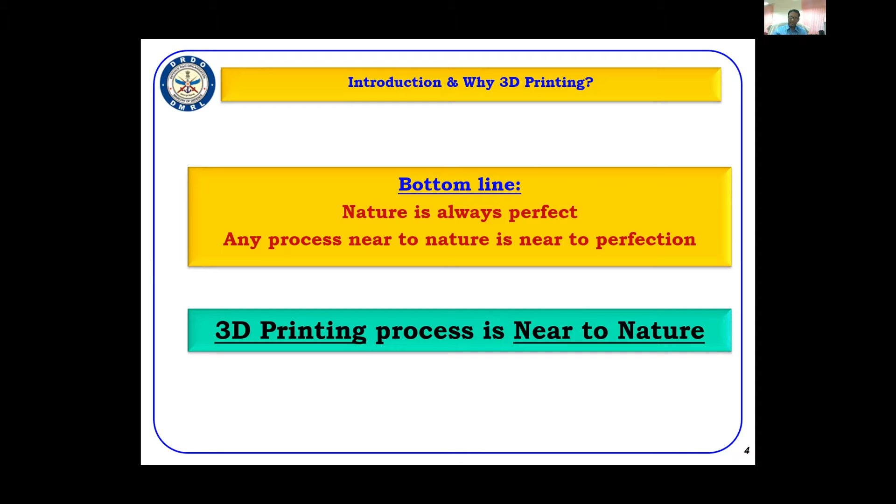Why I'm quoting 3D printing as near to nature, there are some reasons for that. Let us see some characteristics of nature. If we see the assembly, all man-made systems are an assembly of individual parts for the system to work. If you see any man-made system like a car, it is an assembly of thousands of components. Even a simple chair is an assembly of so many things.

But if you see nature, we will not see any assembly. It is unified in nature. Any complex system, even rockets we send into space, are all assemblies of a number of components. Whereas in nature, we won't see anything of this kind.

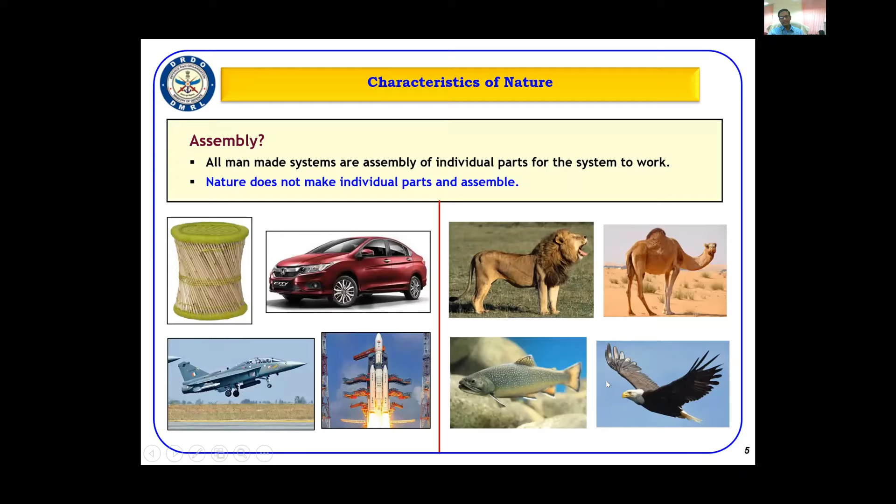Then let us look at the wastage. If you see nature, there is no wastage - almost everything will be recycled. Whereas in the assembly of components, we take a bulk component and start removing material, that is subtractive manufacturing. All manufacturing of components by humans consists of waste.

If you take a specific case of the aerospace sector, the buy-to-fly ratio in some cases is as high as 20. That means if 100 kg of input feedstock or material is taken for a component, we'll get only 5 kg of component at the end. That means 95% of the material will be wastage.

We'll see another... let us see. I request the audience to mute themselves so there will not be any disturbance. You can mute, sir. Wait, one minute, I'll mute him. Can I start again? Yeah, please, you can start, because there was some disturbance.

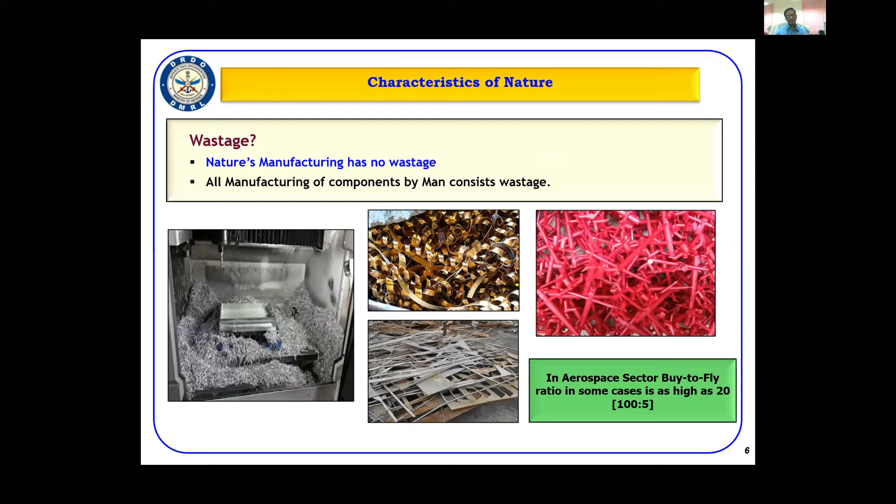This is another characteristic of nature where we hardly see any wastage, whereas man-made structures and manufacturing of any component involve a lot of wastage. In the aerospace sector, the buy-to-fly ratio in some cases is as high as 20. That means about 100 kgs of input feedstock material, if taken for manufacturing a component, finally we end up with only 5 kg of useful component. About 95 kgs of material goes as wastage. Considering the cost of material in this high technology sector, that is a huge cost towards the final component we get from this manufacturing.

Again, if you see the manufacturing, nature manufactures everything by an additive process. Any living thing on this earth will have multi-material composition—not only one material—and will be multi-locational, multi-directional with different properties, and multi-layered. There will not be any assembly; everything will be unified. In many cases nature also makes repairs on its own, whereas manufacturing carried out by humans is a subtractive process where material is removed to create the part, causing a lot of material wastage. Finally, we have to assemble the parts to make the final system.

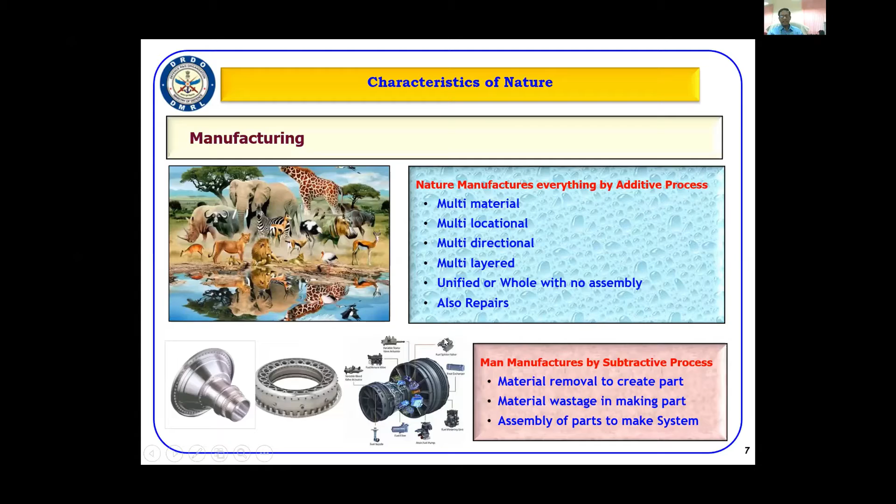So in this slide, I would like to reiterate that one should always approach any problem with open-minded thinking, without any boundaries, restrictions, or inhibition, and without preconceived thoughts. Nature has shown us that everything in nature is perfect, and every process and activity in nature is perfect. Solutions are many times simple, and we should always aim towards efficient processing rather than just doing processing in the normal routine manner. Any process we adopt, being in manufacturing or any other area, if we are near to nature, then we are near to perfection. That is always what we have to aim for.

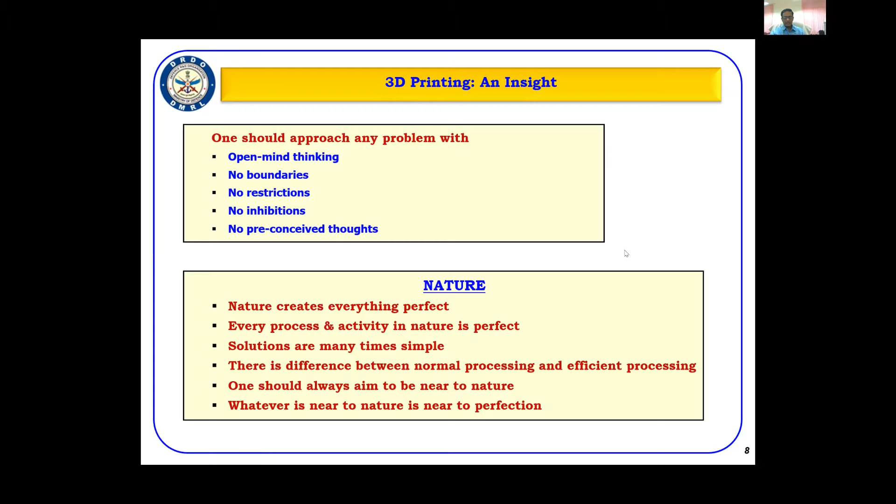So this, in respect of 3D printing, happened in the year 1987, where the sign of manufacturing changed from minus to plus—that means from subtraction to additive—and has dominated since. Earlier, manufacturing was completely dominated by subtractive machining, and with the advent of manufacturing using the additive process by 3D Systems, the manufacturing sign changed from subtractive to additive.

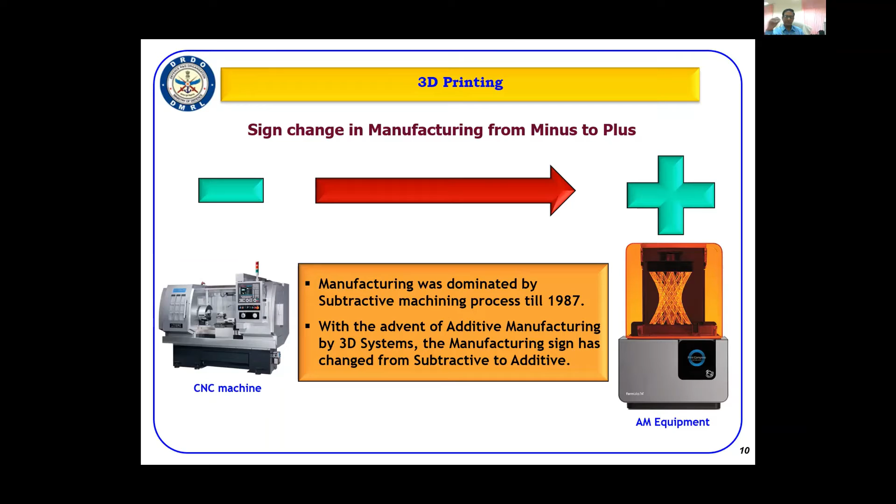We will always be listening to a number of terminologies of 3D printing, additive manufacturing, rapid prototyping—a number of terminologies are coming into the scene, and many times people get confused. I thought I'll briefly give a detailed explanation of these terminologies for the benefit of the audience. Many of you may be aware, but it will still be useful for others who are coming to this course for the first time.

3D printing and additive manufacturing are two terminologies that are synonyms for the same process. Both terms refer to the process of building or joining materials layer by layer from a CAD file. 3D printing and additive manufacturing can be used regardless of the type of material—either plastic, rubber, or metal. Anything manufactured in a layer-by-layer format is termed 3D printing or additive manufacturing.

People who work in additive, industrial, or manufacturing areas prefer to use the word additive manufacturing since it sounds more formal, whereas the media and hobbyists prefer to call this technology 3D printing. This has been more so ever since inexpensive desktop printers became popular, and the term 3D printing has come into wider use. But if we see the standards of ISO and ASTM 52900, it terms this technology as additive manufacturing. So in technical terms, it is called additive manufacturing.

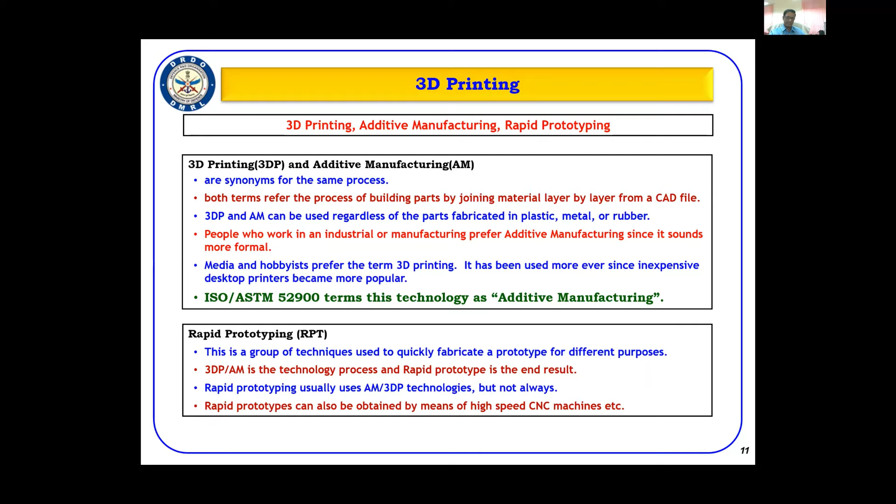If you see 3D printing, we can realize very, very complex components which are otherwise not feasible in conventional manufacturing processes available in traditional technologies. With 3D printing only, it's possible to realize very, very complex designs.

It is also possible to have multiple designs and prototypes. If you see normal traditional manufacturing, if a single design has to go through the stage of proving its design, a lot of tools have to be made and designs have to be made, and it's a very costly process.

Whereas in 3D printing, it is possible to freeze a number of designs at the initial stage itself, and all the designs can be 3D printed in the first stage itself. Then they can simultaneously go for design validation and choose the design which is more appropriate for our requirements.

It's also true that 3D printing in its initial stages mainly contributed to product visualization, because earlier, in the beginning stages of 3D printing, it was mainly made using polymers and plastics, and the main purpose was to visualize the product, to understand how the end product will likely look and what features it will have. That was one of the major advantages of 3D printing.

I'm in a meeting, I'll call you back.

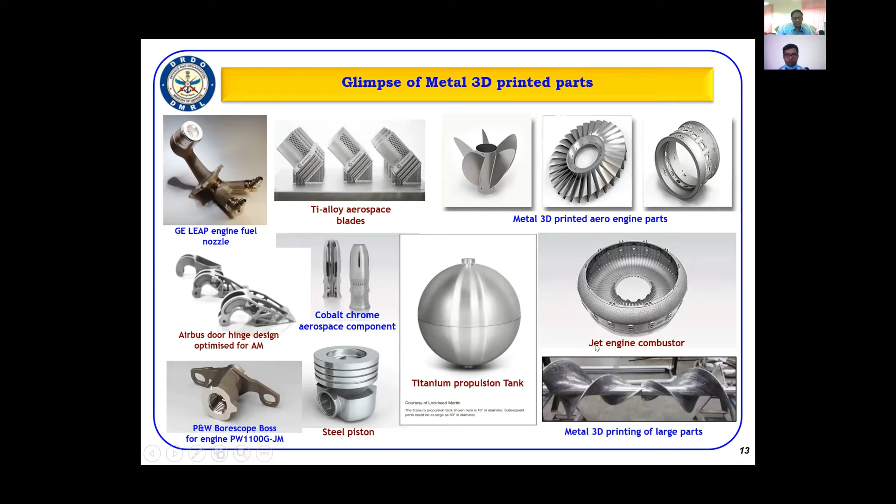Yeah, and even large size parts are also possible using these 3D printing technologies of this nature. So those are related to the advantages or benefits we are going to attain.

Just excuse me one second. Hello, I'm in a meeting. Meeting, no, I'll call you back after 1 hour.

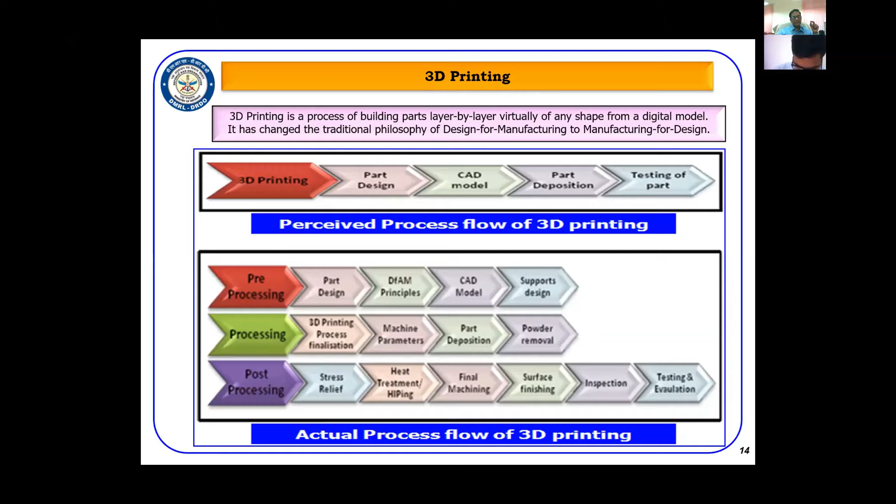Many times the surface finish of the component attained in 3D printing may not be up to requirements, so we have to adopt different techniques for improving the surface finish, then inspection, and since this is a new technology, a full-fledged evaluation and testing of these components is required before final release for actual applications. So the normally perceived process of 3D printing actually has a lot of other processes that are part of it, which have to be taken care of in detail by those using this technology for their applications.

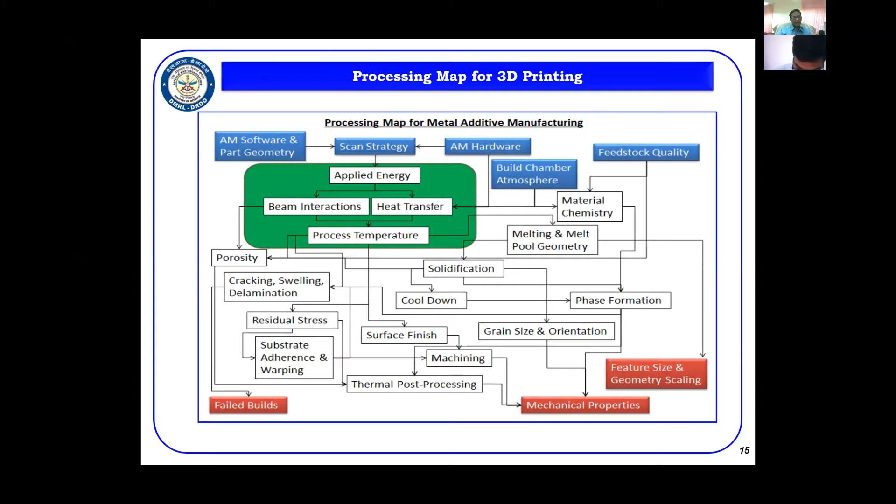Now looking at the processing map for additive manufacturing - this is the additive manufacturing processing map - there are a lot of properties and things we have to take care of, like software, scan strategy, what hardware we are going to use, what feedstock quality, and what porosity we are going to get.

In the pre-processing stage, the knowledge of the feedstock or powder material is very important. Unless we have a grip on these powder metallurgy processes, we may finally end up with porosity, which may result in failed builds.

In the processing stage, the laser-metal interaction has a very dominant effect on the process of solidification, cooling of molten alloy, material chemistry, and melt pool geometry. These processes are directly responsible for the formation of different phases, grain size, and orientation, which dictate the final properties obtained on the component, or the defects on the component. Even in post-processing, thermal processing like heat treatment and hipping are all very important.

One has to take care of these aspects whenever attempting metal 3D printing, so that you will be able to get the component with the required properties and required features and geometry, without any problems of porosity or other defects. Metal 3D printing is not just a printing process, it is a conglomeration of metallurgical and mechanical engineering. Independently, either of these disciplines will not be able to reach the final goal. Both the mechanical and metallurgical aspects of the material behavior of metals in 3D printing have to be understood in detail, so that components can be obtained with proper properties at the end of this process.

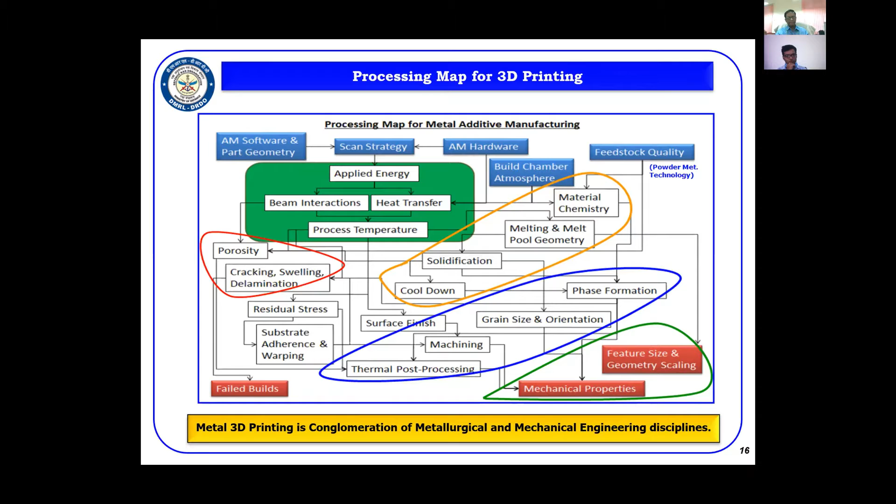Again, in this, the 3 P's are very important, as I mentioned. In the pre-processing, identification of the individual part or component is very important, because we have to see which component is very difficult to manufacture as an independent part due to complexity or high material or manufacturing costs, or choose a component which is very complex to assemble, where individual parts involving welding are prominent reasons for failure of components.

So wherever components have such features or processes, those components have to be selected. It is not that every component has to be selected for this process, because traditional manufacturing technology also has its own say, and when parts are manufactured in bulk, traditional manufacturing will still have an upper hand because of commercial aspects. So the identification of which component has to be identified must be very clearly understood, and only complex components should be considered for 3D printing.

The second aspect is the redesign of the component. The parts we have been selecting are all designed based on traditional manufacturing design principles, which are often over-designed. So when a component is adopted for additive manufacturing, we have to relook into the redesign of the component, so that we can reduce the number of materials or the assembly or number of parts, to finally improve weight reduction and product performance. We can also incorporate additional design features to improve efficiency. This redesigning aspect, if possible, has to be taken care of in the pre-processing of the component taken up for additive manufacturing.

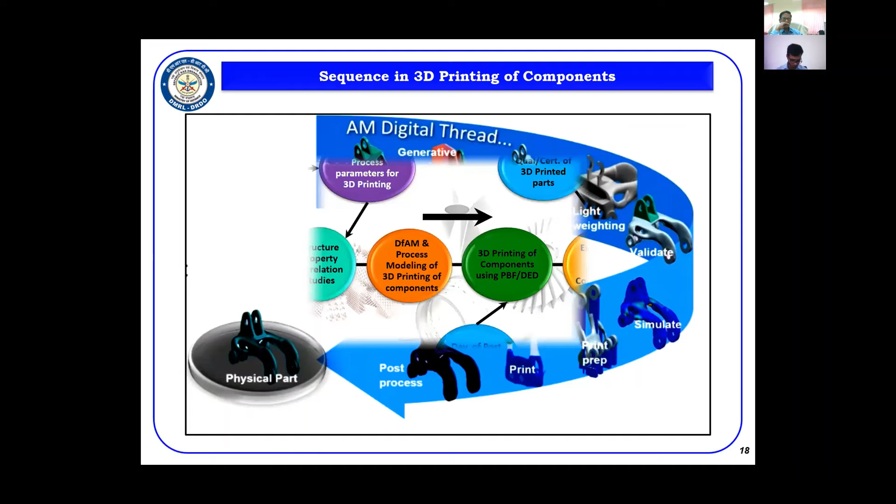This is the flow chart of the 3D printing technical activities. We can even see which type of technology has to be adopted, which will be explained in the coming slides, such as powder bed fusion or directed energy deposition.

We can talk about structure property correlation studies, design for additive manufacturing principles to be adopted, modeling of 3D printed components, and simultaneously studies on qualification and certification of 3D printed components. That is a major area. Unless components are qualified or certified for final use, it's not possible to release them for actual applications. Delivery of final components only happens after qualification or certification has been carried out.

Before going ahead, I'd like to present the classification made by ISO ASTM 52900. Additive manufacturing processes are divided into 7 different categories. I will not go through the other categories of 3D printing. I'll limit my discussion only to metal-related 3D printing, where powder bed fusion and directed energy deposition are the two major technological processes applicable for metal 3D printing.

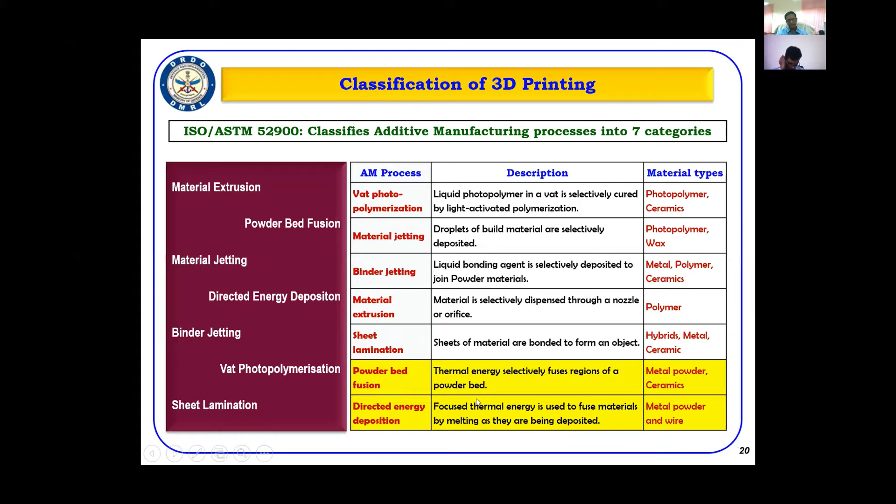For powder bed fusion, there are a number of synonyms: DMLS, direct metal laser sintering, multi jet fusion, laser cusing, electron beam melting, selective laser melting. All these terminologies apply to powder bed fusion technologies. In this process, a layer of powder is spread over the build platform, and the laser or electron beam fuses the first layer as per the CAD model of that layer.

Once that layer is fused, the next layer of powder is spread across the previous layer, and the process repeats until the entire model is created. This is generally termed powder bed fusion, also called powder bed technology. Other technologies like directed energy deposition are called powder fed technology, where material is deposited from a nozzle.

These are the nozzles - there are 4 nozzles - with a high power laser or electron beam that fuses the metal or solid metal of the object. Material can be in the form of powder or even wire in some equipment. Material is again added layer by layer and solidifies to create the final object.

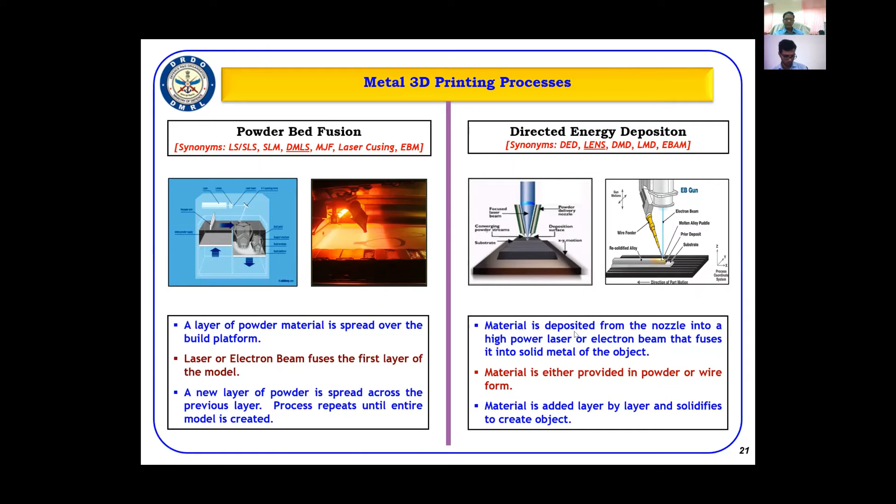In powder bed fusion, components with highly complex design and fine features can be made up to 300mm. Now equipment is coming even above 400mm with multiple lasers, and products requiring good surface finish and minimal machining can be 3D printed directly for end-use applications using this technology.

Topology optimized designs for weight reduction, including conformal cooling channels or lattice and foam structures, can be 3D printed using this technology. All biomedical applications use powder bed fusion for manufacturing bioimplants. PBF is a proven technology for industrial production and on-field deployment, and a lot of components are being made using this technology.

There is a very high requirement in the defense sector for producing components through this technology because of the complex and intricate design features or innovative designs required. This is the most appropriate technology to adopt in the defense sector, and it is essential for development and optimization of process parameters for 3D printing of indigenous development requirements.

The powder requirements for powder bed fusion technology, the material powder required as input feed material, is in the range of 10 to 40 microns - only this type of powder can be used. The equipment cost compared to DED or EBM is on the lower side, whereas the only disadvantage of this process is that it's very slow. The speed can be 10 to 200 grams per hour, whereas input material cost is very high. Typically, Ti64 material costs about $600 per kg, and Inconel 718 costs $200 per kg.

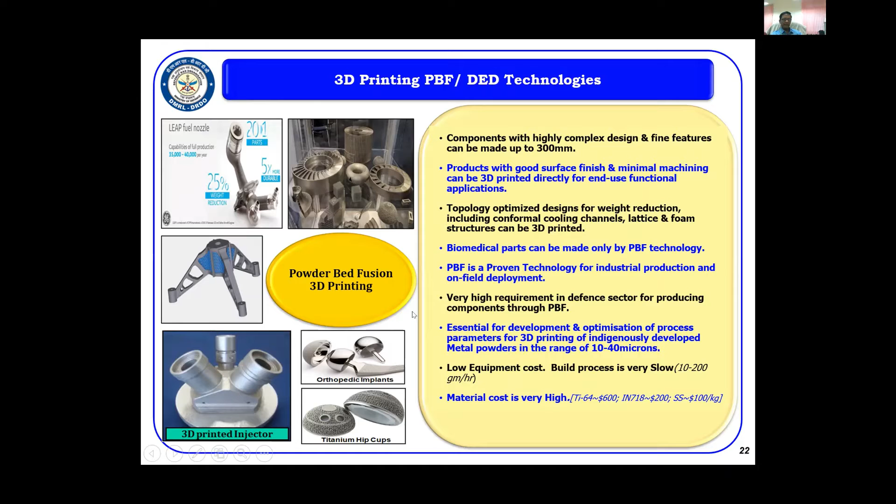Coming to the next technology, DED, direct energy deposition. Here we can manufacture components using 3D printing up to a medium size of 600 mm, with relatively less complex components. But this technology has another advantage of developing functionally graded materials. This is only possible with this technology, where you can have different layers of different materials to suit the requirements of our designs. Such functionally graded materials are possible only using this technology.

This technology can also be used for repair of very high value parts, mainly in aero engines, where rejections and the cost of rejections are very high. All these rejected parts can be repaired or refurbished using this technology, and a lot of foreign exchange can be saved. It is also possible to use this technology for feature additions.

This is the only technology feasible for this. Powder bed fusion is not possible for feature addition. Any feature that has to be added to an existing part can only be done using the DED 3D printing technology.

It is also possible to develop new materials. We need not restrict our developments only to existing materials. It is possible to have newer materials with multi-alloy powders and different types of properties suitable to our requirements. This is possible only with the DED type of 3D printing.

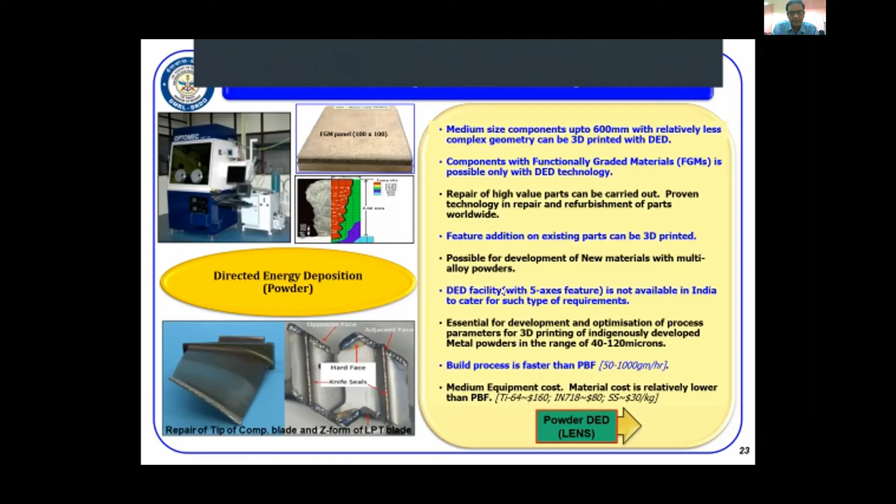I think participants might have seen the direct energy deposition of the material in a layer by layer fashion, and that is how the process works. Similarly, there is...

Similarly, I will talk about the other type of DED technology where wire is the input feedstock material. Using this, we can go up to sizes of 1500 mm. It is mainly applicable to gas bottles, and huge forged components can be made using this technology.

This has already been proven for the propulsion tank gas bottle, where Lockheed Martin has demonstrated that development cost has been reduced by 55%, and time has also been reduced by 80% when compared to conventional manufacturing of this component.

It is also suitable for a broad range of materials, including refractory materials. Refractory materials were a little tough in powder bed fusion, whereas these materials can be easily 3D printed using direct energy deposition with wires.

Coming to the cost of this component, the input feedstock material is far cheaper when compared to powder. But the disadvantage is that the cost of the equipment is too high.

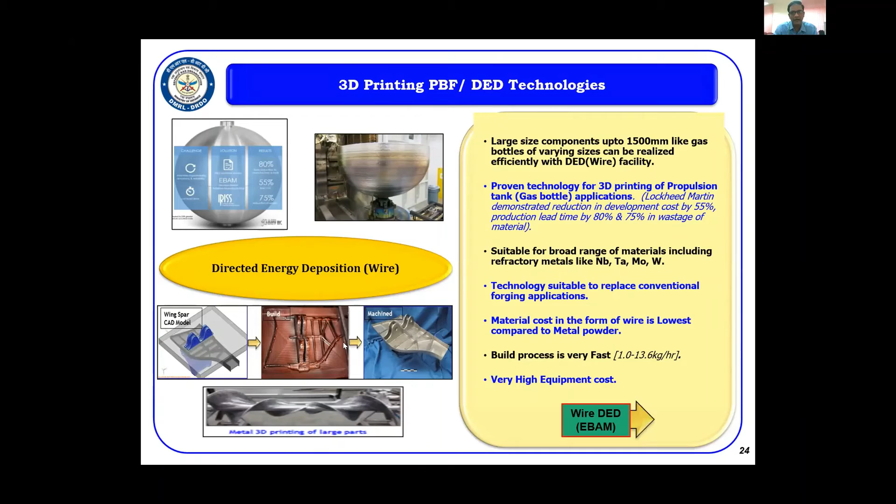Depending on the type of requirement, the complexity of the component, and the finish required, we have to select which type of technology should be adopted. It is not a single solution for all applications. It has to be decided based on the application, complexity, shape, size, and quality requirements. Finally, cost and time also matter most.

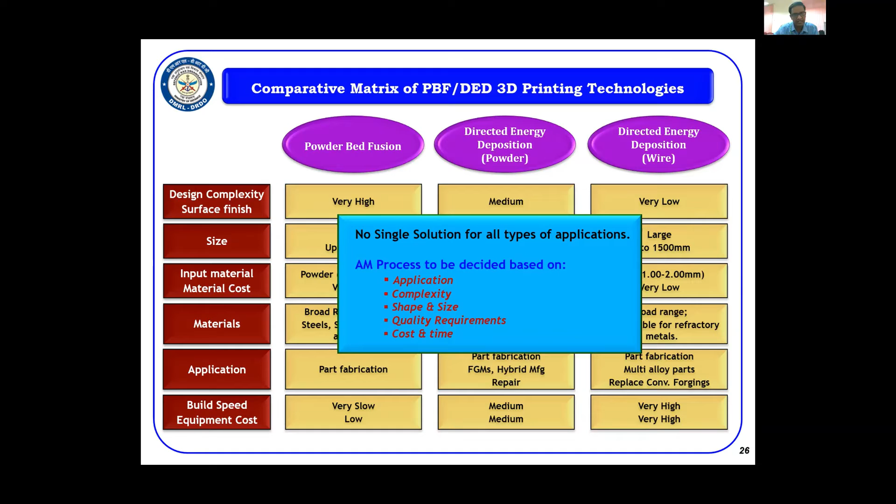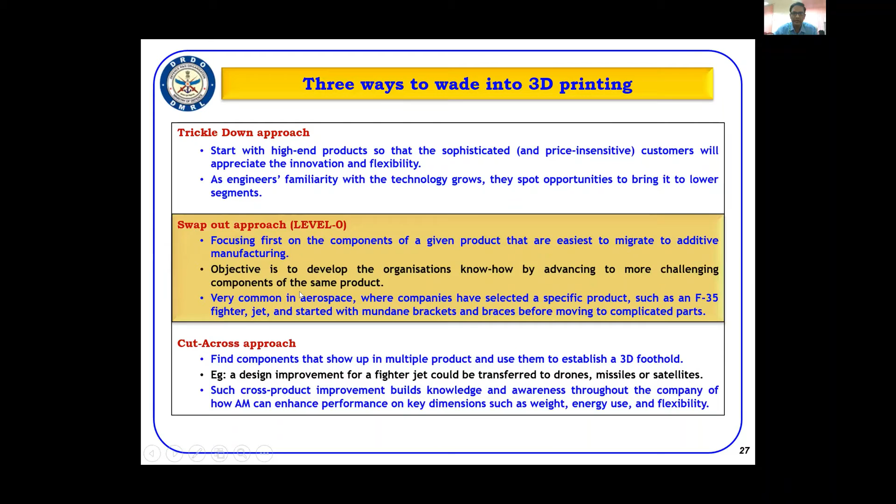This is one of the major, very good slides adopted by GE USA. They have come up with different levels of thinking: level 1, level 2, and level 3. In level 1, an existing multi-piece part is taken up for demonstration with a reduced number of components using 3D printing. The classical example is the jet engine fuel nozzle.

In level 2 thinking, the components taken up are at the system level, where one module of the engine is taken for 3D printing. Over 100 pieces were consolidated in the example of a CT7 combustor, and redesign of these components gave significantly cooler temperatures. There's an example of that application already shown.

In the design for additive manufacturing philosophy, the total engine is subjected to design review, and each and every component has to be handled using 3D design for additive manufacturing principles.

One example where this approach was made is the advanced turboprop engine of GE, where 855 parts were reduced to just 12 parts. That means 35% of the engine was reduced to only 12 parts, with 855 parts clubbed together. This also resulted in elimination of a number of structural castings, and the development cycle was reduced by half.

So 3D printing is fabrication of components, but it's not only 3D printing. Once we 3D print a component, the story doesn't end there. Detailed evaluation of the component is very important, and that is what adds to its applications - that is the value addition that has to be made.

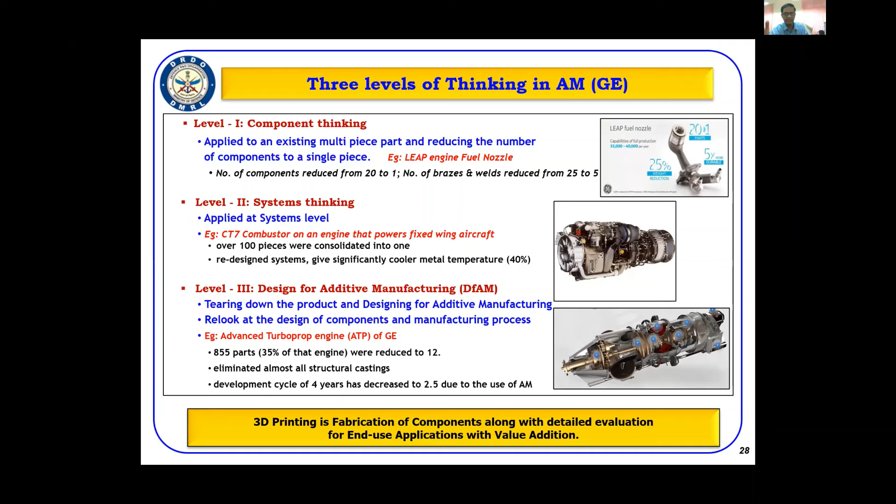Now let us come to the actual case studies. This is the equipment or facility we have in DMRL, established in the year 2008. This was one of the unique equipment available in the country at that point of time, with a working space of 300 by 300 by 300, working on the DED principle, with a power of 1 kilowatt.

We had 2 powder delivery systems with 4 nozzles, and as I mentioned earlier, it was only a simple 3-axis machine where very simple parts could be made.

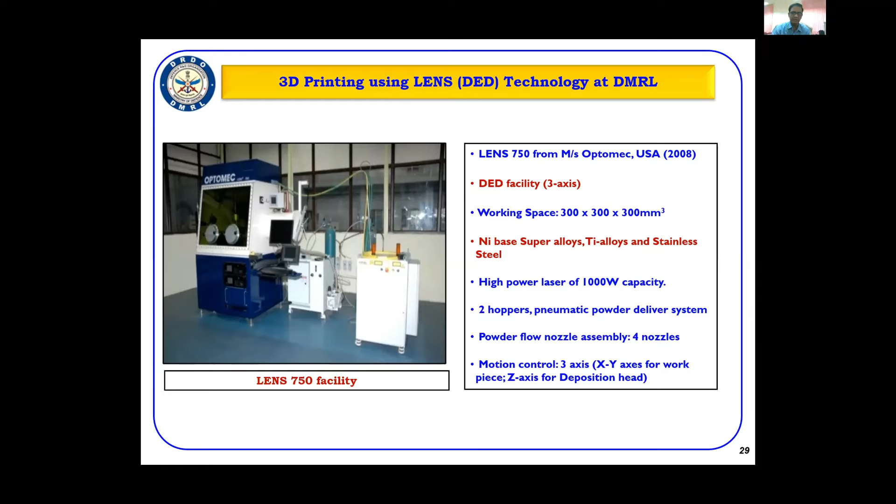The main intention of having this facility was to understand the metallurgical aspects of materials in 3D printing - how they behave, and what sort of metallurgical features result - studied in detail using this equipment. This is one of the activities we carried out for development of FGM panels for hypersonic applications.

We developed the know-how for optimization of parameters. That means, before taking up material for actual deposition, we should be able to understand the most optimized parameters. We adopted the design of experiments approach, so that using only 13 specimens, we could get the most optimized parameters required for this material.

So for almost all materials we were handling, the process parameters have been optimized and developed. We have also demonstrated the feasibility of making FGMs using very precise control of layer composition in materials SS316 and 625, and also developed Ni-YSZ ceramic based FGM panels for combustion liners for high temperature applications in hypersonic vehicles. We have also established process modeling techniques for estimation of melt pool dimensions, thermal cycles, and hardness distribution along the process length for one of the materials.

From this I'll touch on one or two cases in the subsequent slides. If you see the matrix, this is what we generated for 13 different specimens to obtain the optimized parameters. I would like to draw your attention to experiment number 2, where the laser power was 300, scan velocity 8, and powder feed rate 21. We resulted in a porosity of about 0.7%.

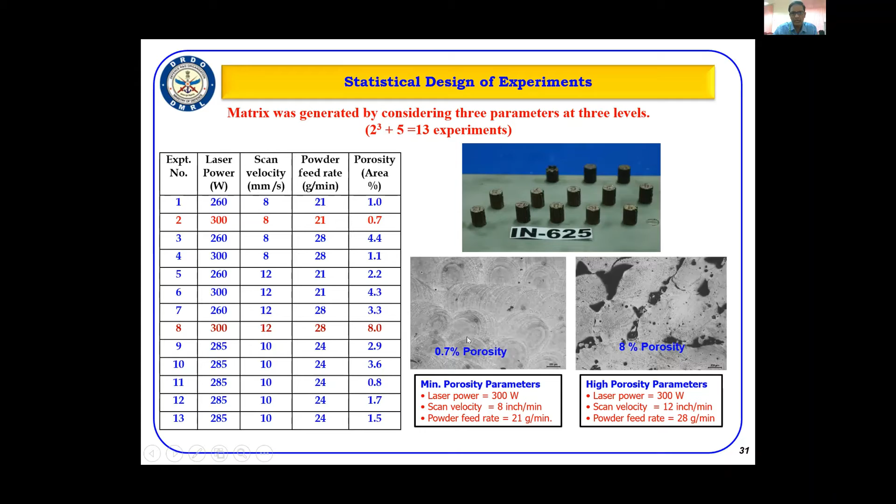Whereas for the same laser power, with different scan velocity and powder feed rate, the porosity was 8%, meaning it was only 92% dense. So such things are possible, and one has to obtain the optimized parameters before going ahead with the actual deposition of the component.

We have also evaluated the tensile properties of the deposited materials for two different materials, 316 and 625, shown here. They are all near to the wrought and annealed process. These are the tensile properties obtained using the optimal process parameters. Using these parameters, the deposited samples are all at par with that of the wrought and annealized material.

But we have seen a very, very fine cellular structure in the deposit, which compensates for not being heat treated. That means as-deposited itself, we could get properties that are near to the heat treated properties. This has been attributed to the very fine cellular structure we obtained, compensating for the lack of homogenization treatment and grain refinement during mechanical working, while still achieving equivalent properties.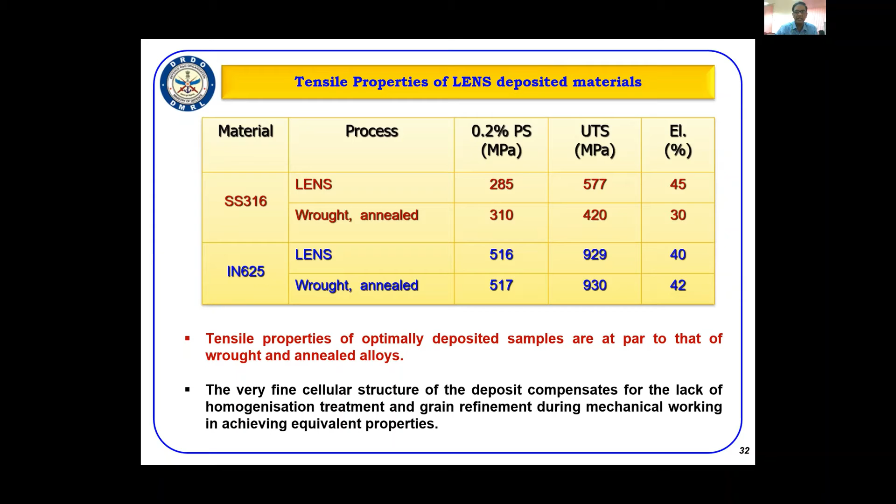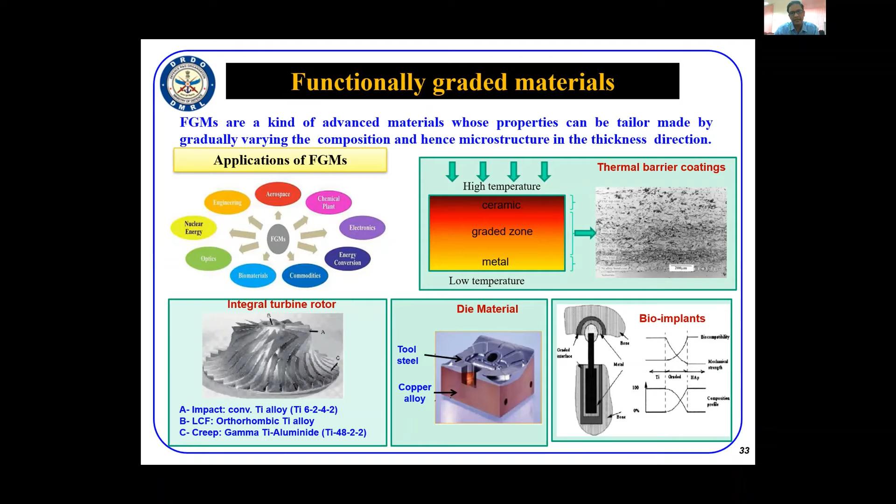And this is about functional graded materials - these are again a kind of advanced material whose properties can be tailor-made gradually varying the composition and hence microstructure in the thickness direction. These functional graded materials we have developed for hypersonic applications, and I'll go into a little more detail on one of the activities we took up for this FGM component.

So here we have YSZ thermal barrier coatings on nickel-based alloys, where the initial base material is nickel-based, and these components involve very high thermal shocks and high temperature exposure using the LENS facility. The conventional YSZ coating, when applied on normal superalloy, was suffering from low durability because of the large mismatch in thermal expansion between the metal and ceramic.

Due to this, the coating was failing, so we adopted the route of 3D printing or direct energy deposition using this technology. Gradually, the variation of thermal expansion was attained along the thickness using a varying composition FGM via LENS processing. This process reduced the thermal stress and hence increased the durability of the coating.

Initially we successfully developed and demonstrated the coating for a 100 by 100 mm sample. We used two different bond coats on the substrate of the 625 alloy, and the composition of ceramic has been varied from 25, 50, 75, and 100%, so that a gradual variation of the coefficient of thermal expansion was obtained. These were subjected to thermal cyclic resistance testing and were meeting our requirements.

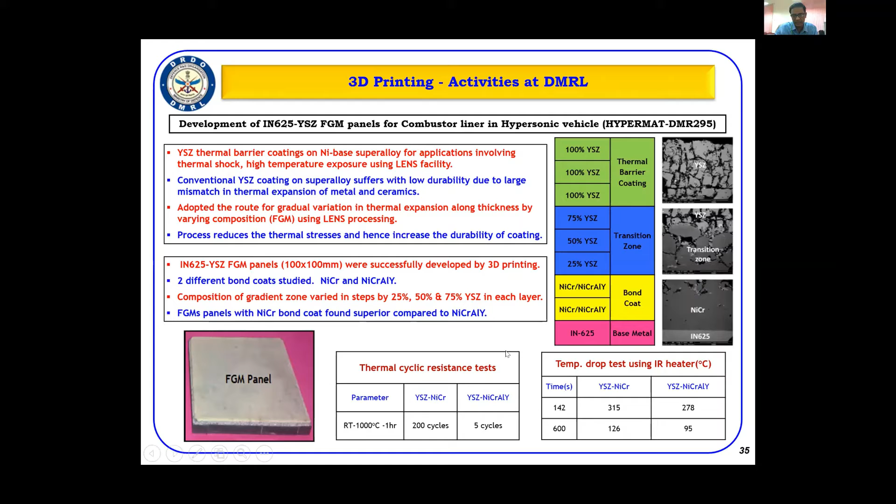And this is one other piece of work that has been carried out. Let us go further.

Again, using this facility, I would like to talk a little about its limitations. We could only demonstrate simple shapes using these components - complex components cannot be made due to this restricted 3-axis limitation. Presently, machines are available with 5-axis features. The machine we have is also not having closed loop process quality control, whereas the latest machines are now equipped with this type of feature. The limitation of size was also one of the problem areas - now machines are coming with higher build sizes.

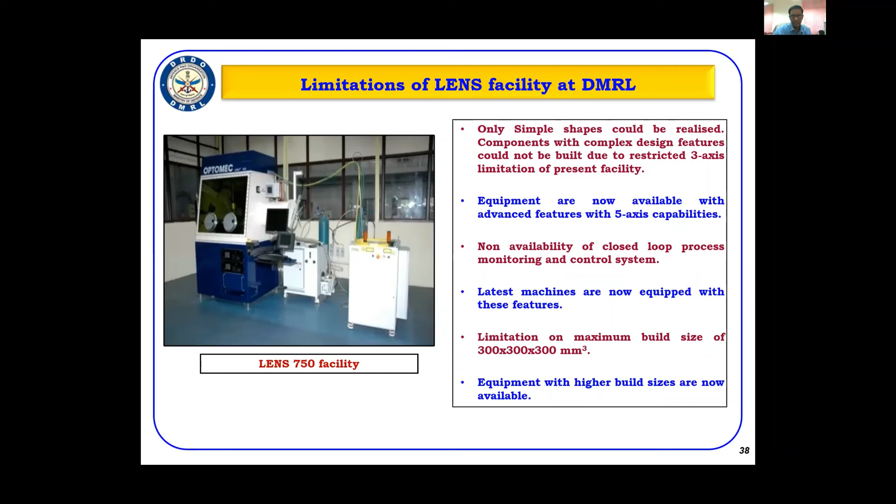In the conventional manufacturing, this component is an assembly of 2 parts: the injector and the injector ring at the bottom. This was being made using complex machining from a cylindrical block using CNC machines. Part 2 is welded to part 1 using EBW welding, which is a very costly process, and the 3 injector holes are made through the EDM process. This is the presently conventional manufacturing methodology being adopted.

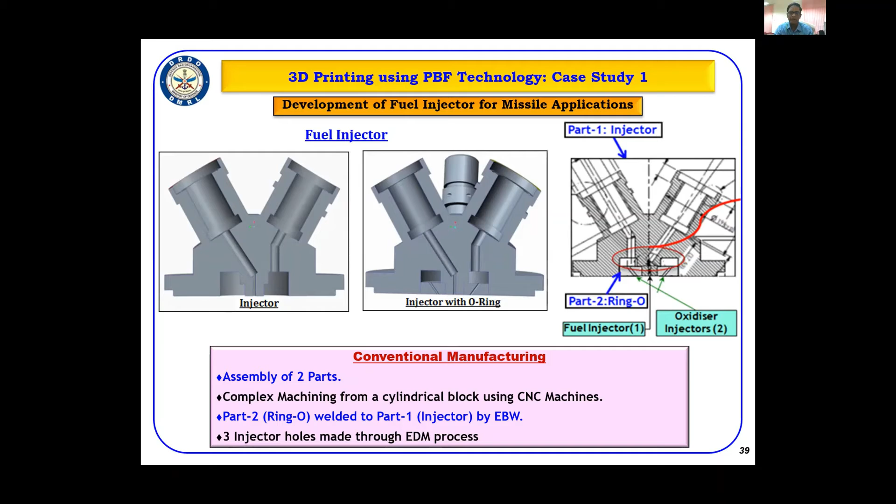This component has been taken up for 3D printing. Initially, it is necessary to look into the design features of this component and make necessary design modifications to make it suitable for 3D printing. In 3D printing, we have assembled the 2 parts into one, eliminating the welding aspect and modifying the design to completely avoid support structures.

If we see the internal regions where the oxidizer or fuel will be coming through, there will be... for manufacturing, as I mentioned, we have to go through the redesign of this component. The assembly of 2 parts has been made into one.

In the conventional process, the initial design has a rectangular cross section. To manufacture this using 3D printing is not possible without providing certain support structures. But if we provide support structures there, it's not possible to remove them after the deposition of material is completed. That is the reason we adopted a novel design approach where the internal rectangular cross section has been modified to a triangular cross section, removing the necessity of support structures.

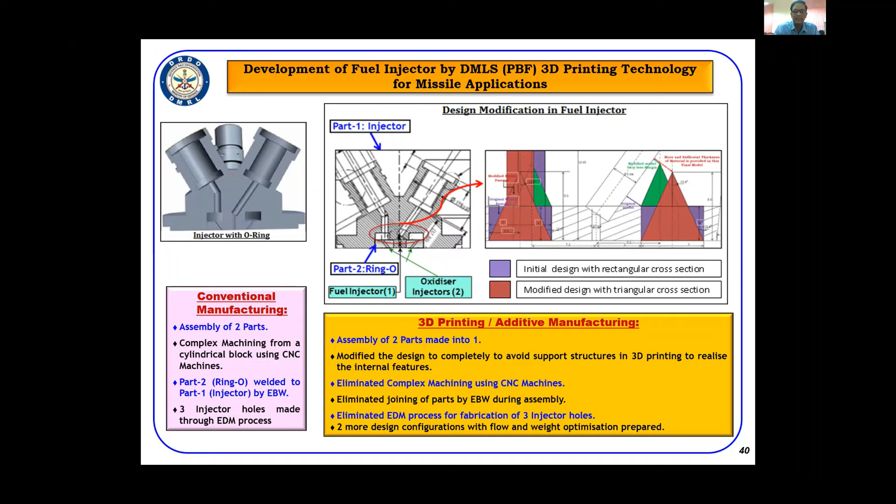This is the initial design we made, and we also made 2 more designs with flow optimization, which we'll talk about in coming slides. This is the design of the initial version where the fuel will be coming through this channel and the oxidizer will be coming through this channel, which will meet for the further combustion.

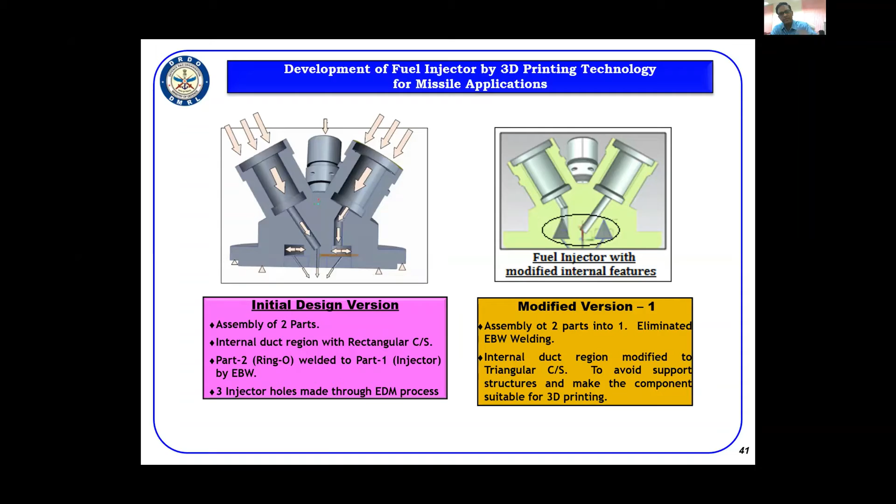In the modified version, 2 parts have been made into one, eliminating the necessity of EBW welding, and the internal duct region is modified into a triangular cross section to avoid support structures and make the component suitable for 3D printing. These are the only minimal changes made compared to the conventional component, which has been taken up for 3D printing using the facility available at HAL.

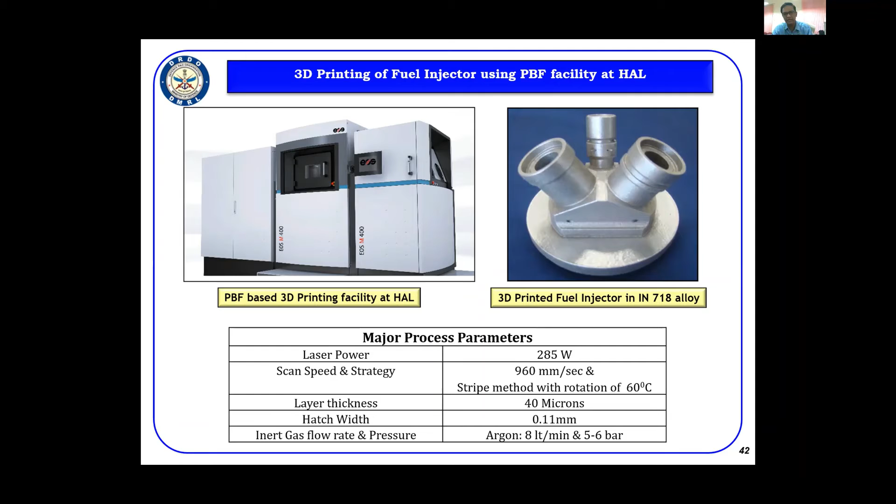We have carried out this deposition using optimized parameters as mentioned here. The layer thickness we adopted for each layer is 40 microns with a hatch width of 0.11, and the inert gas used was argon at 8 liters per minute. Using this facility, this is the component we have 3D printed.

So the story doesn't end there. Just having the 3D printed component and going for the application is not possible. We have to carry out detailed evaluation and testing of this fuel injector component to understand whether it meets the mechanical properties, whether it meets the metallurgical properties, and other requirements.

Initially we carried out the chemical analysis of this component, taking material from it, and checked whether the composition matches that of 718 with the AMS 5662 specifications. The material was found to be homogeneous, and the elemental composition was found to be within specification. That is one of the good results we obtained regarding the chemical analysis of the component.

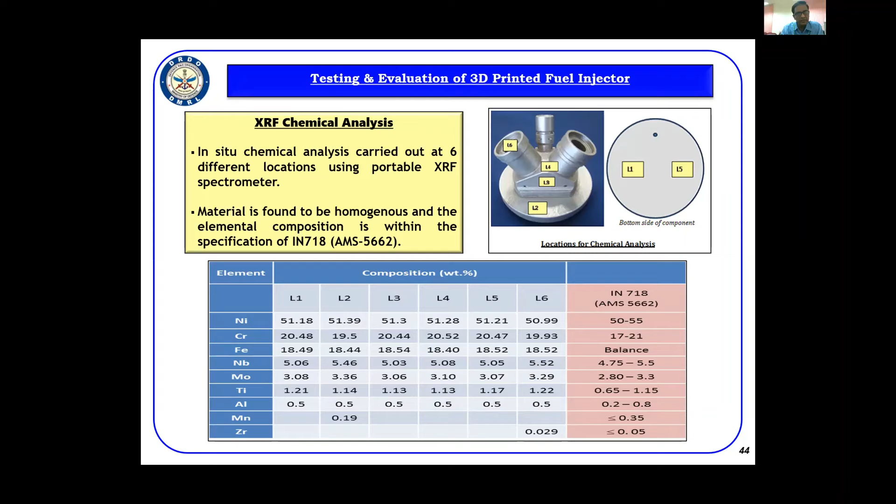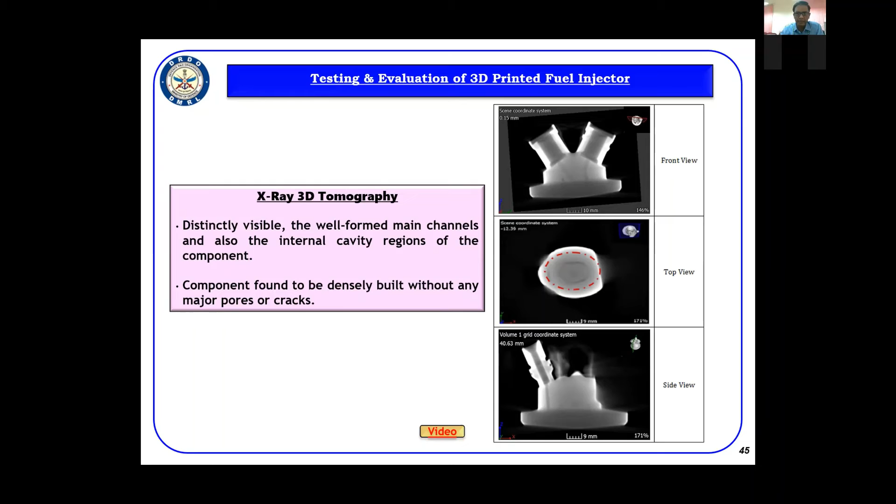Then we wanted to see whether the internal features had been built properly. We can't go with destructive testing of this component, so we adopted X-ray 3D tomography, where images have been taken at different layers. We saw very distinctly the well-formed main channels and internal cavity regions, and the component was found to be densely built without any major pores. These are the pictures from the computer tomography. Then we took a small piece.

We have carried out further evaluation to understand the metallurgical aspect of this material deposition. We have taken a small piece from the component to see what sort of microstructures have been obtained, in both the transverse direction and the longitudinal direction.

In the transverse direction, we could clearly see the scan tracks, and the melt pool formation was also very clearly visible in the longitudinal direction, as shown in each layer. The presence of subgrain formation and very fine cellular dendritic structure, which is very common for 3D printed materials, has also been observed.

We have also seen columnar grains growing in the build direction. In the build direction, grains are found growing in the columnar direction because of the remelting of the previous layer of material.

As per our earlier experience of DED metal 3D printing using the LENS facility, similar structures have also been obtained on 625 and 316 materials in LENS deposition. But we have seen certain amounts of porosity, very fine impurities, and very fine porosity in the microstructure evaluation, which we have taken up further for analysis.

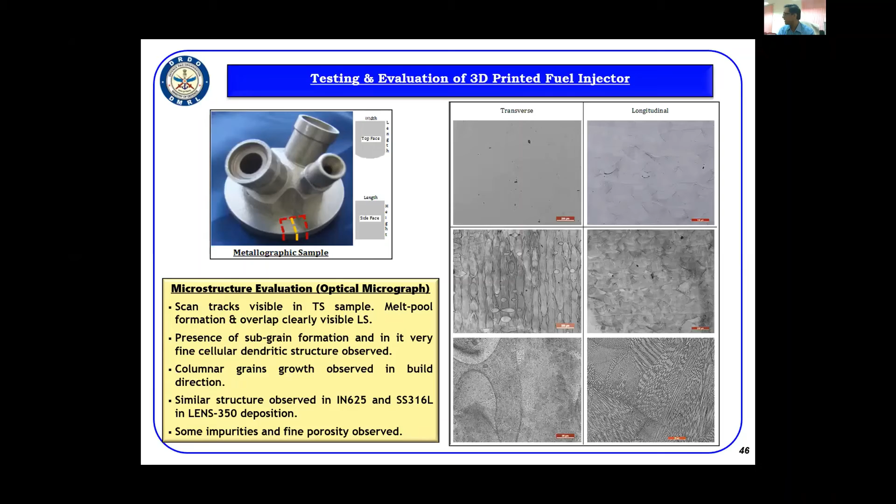We have also seen heavy elements segregated in the interdendritic region, consistent with previous studies, due to high solidification rates, which is not generally seen in conventional materials. This type of segregation was not visible before, but we have seen it here.

There are also spherical pores formed in the microstructure evaluation, which we could not initially understand. We thought these were all entrapped gases. The overall porosity was determined to be a bit less than 2%.

To understand these impurities, further analysis was carried out using EDAX spot analysis to examine the gray and dark particles. What we found in this analysis is that the fine spherical particles were identified as alumina and silica particles, which are not present in the 718 alloy.

We went back to the records to see what may be the reason. One conclusion made is that these might have formed due to contamination from a previous campaign of 3D printing using powders like Al-10Si-1Mg at HAL. So it is very important to plan campaigns systematically, where a complete cleaning process of the machine is taken up before starting a campaign with any other material.

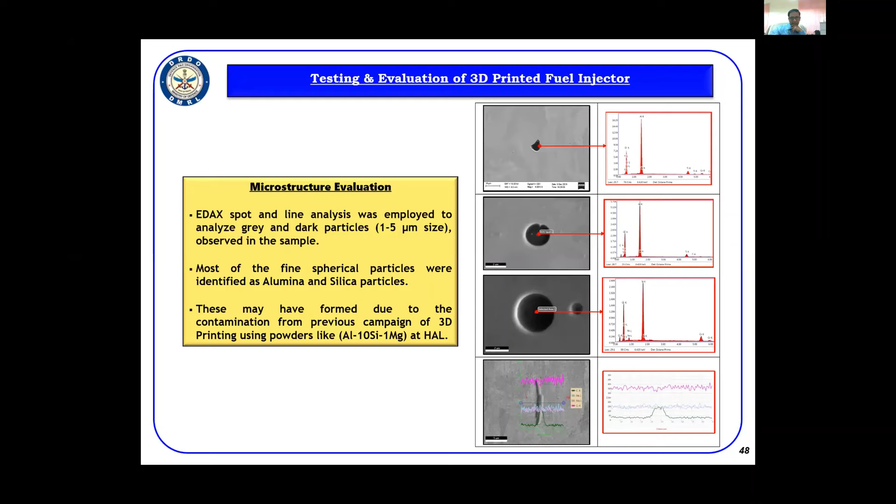This is one aspect everyone has to look into when working on the same machine using different materials. This type of impurity will be dangerous with respect to the life of the component being 3D printed.

A little amount of XRD analysis has also been carried out to understand the strengthening phases. As we are all aware, in the 718 alloy, gamma and gamma double prime are the strengthening phases that are normally obtained only after heat treatment. But we were able to get these strengthening phases in the as-deposited condition.

Also, the EBSD characterization phase map has revealed gamma double prime in contrast to gamma, shown here in red color, with a total volume fraction of about 8% obtained in the as-deposited condition. Again, this is due to the very fine cellular structure and the repeated melting and solidification process, which is why the strengthening phases also formed in this as-deposited condition.

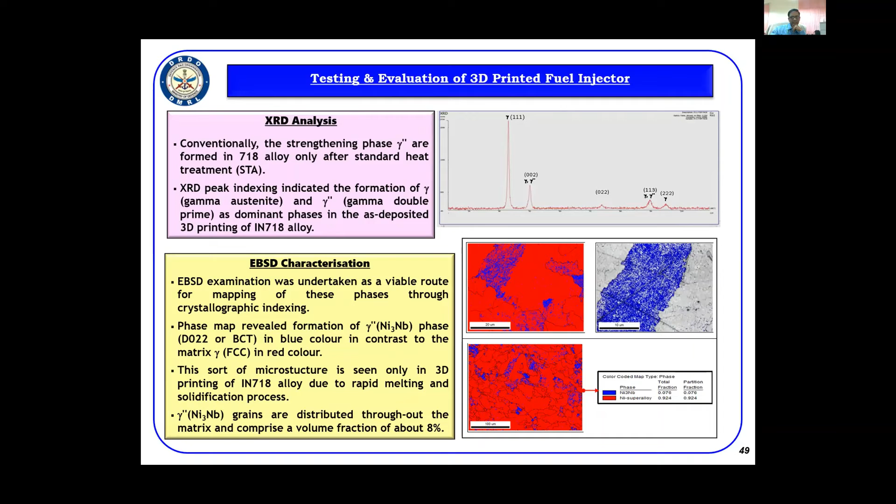We further went ahead to understand the residual stresses, because very high temperatures are involved in the deposition of these 3D printed components, and these residual stresses have to be relaxed. To understand what sort of residual stresses were present, we adopted the XRD approach and found that the residual stresses were compressive in nature, as expected, in the range of 500 to 600.

Micro hardness and elastic modulus were also carried out using instrumented micro hardness testing, and finally we were able to see that the UTS values were found to be at par with wrought 718. These are the various tests that have been carried out on this component.

As mentioned earlier, we have gone ahead with 3D printing of this component in the first stage with only minimum component modifications, but further design modifications have also been carried out for flow optimization, where the abrupt change of flow paths into different cross-sectional areas has been smoothly converted to a continuous change of cross-sectional area. We have also seen that the weight of the component can be reduced using lattice structures in zones of non-critical regions.

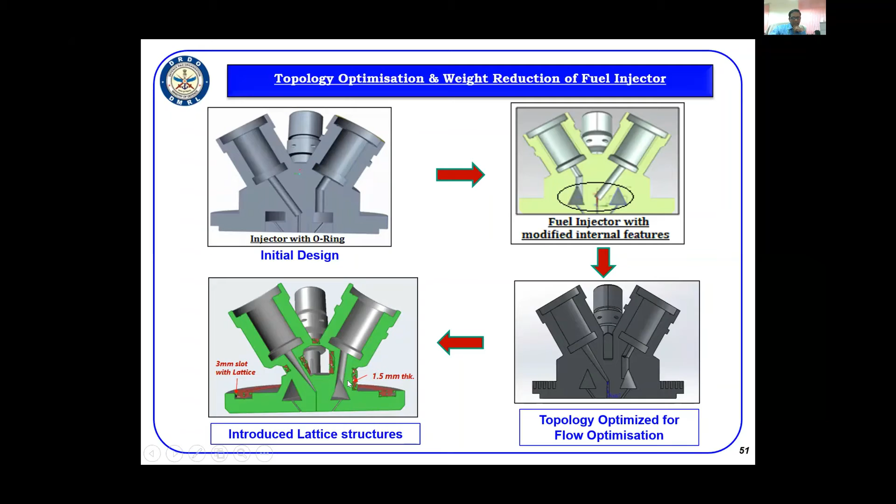This is modified version 1. In modified version 2, the internal duct region was modified to avoid support structures, and the flow passage has been optimized and redesigned for smooth flow without any abrupt changes in area. In design 3, further redesign of the component has been carried out, with weight reduction achieved through topology optimization.

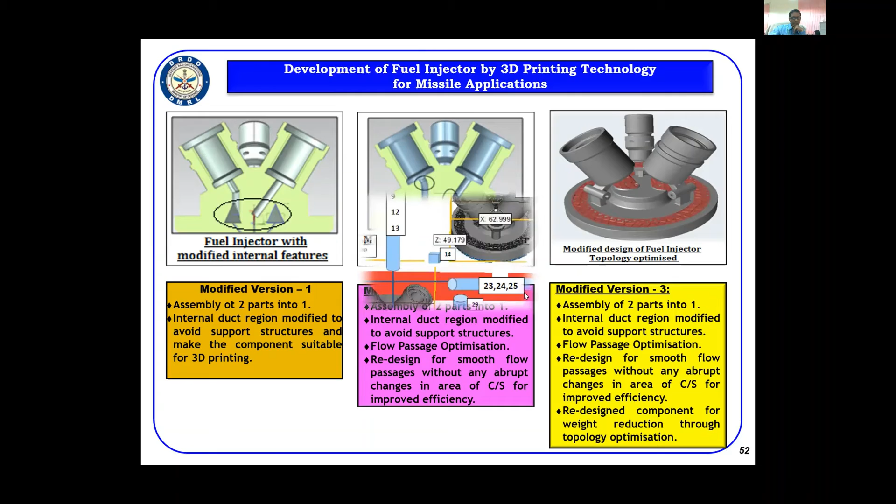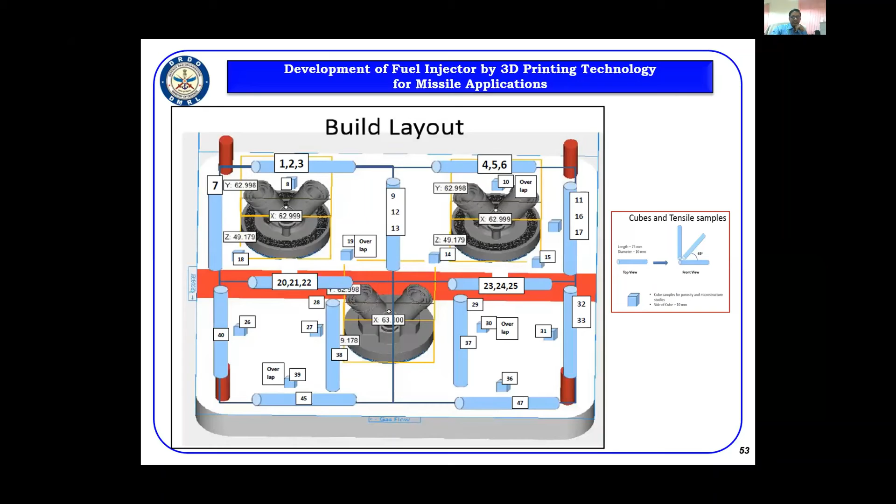All 3 designs could be realized in one deposition. This is one of the major advantages of 3D printing, where we can realize different design versions in one deposition itself, then study those components for our requirements.

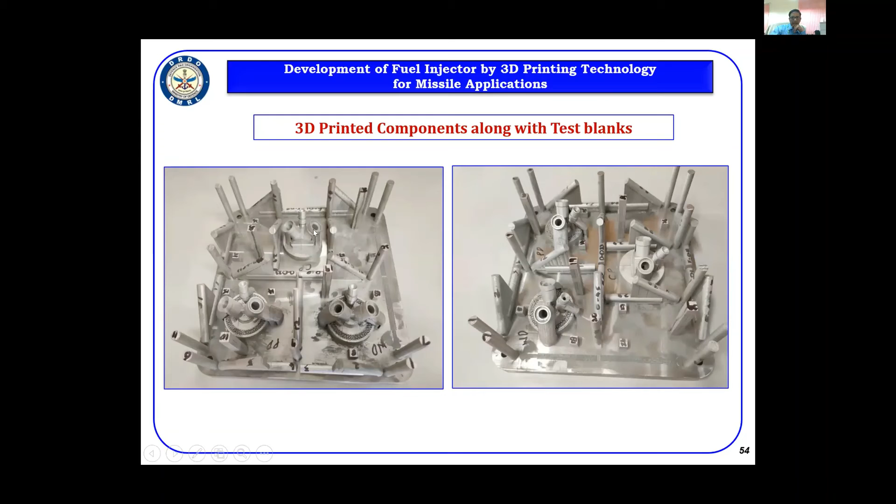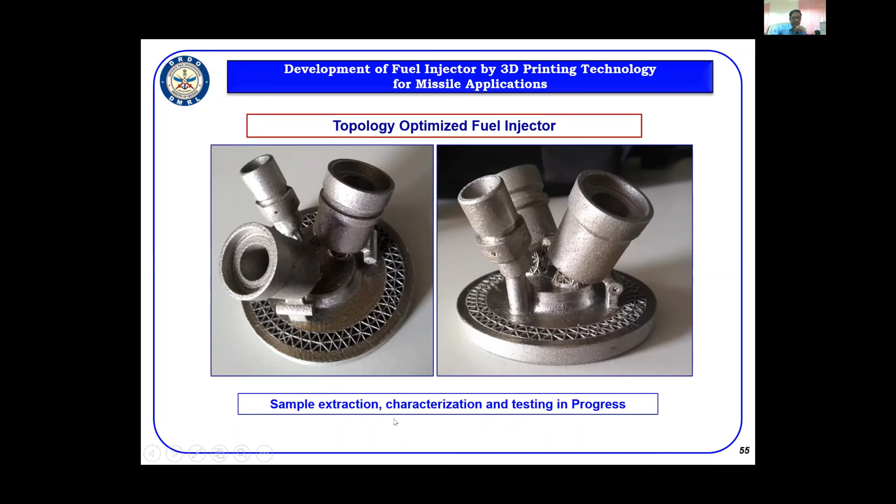And this is the actual as-deposited fuel injector. Here you can see some support structures, the external support structures that were provided to support some regions of the component. This is the 3D printed component after the support structures have been removed and the lattice structure has been made. Sample extraction from this is also in progress in DMRL.

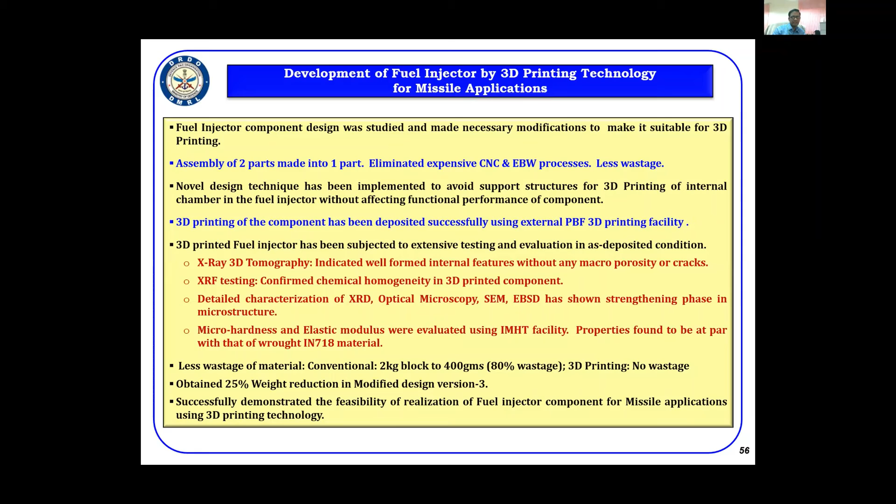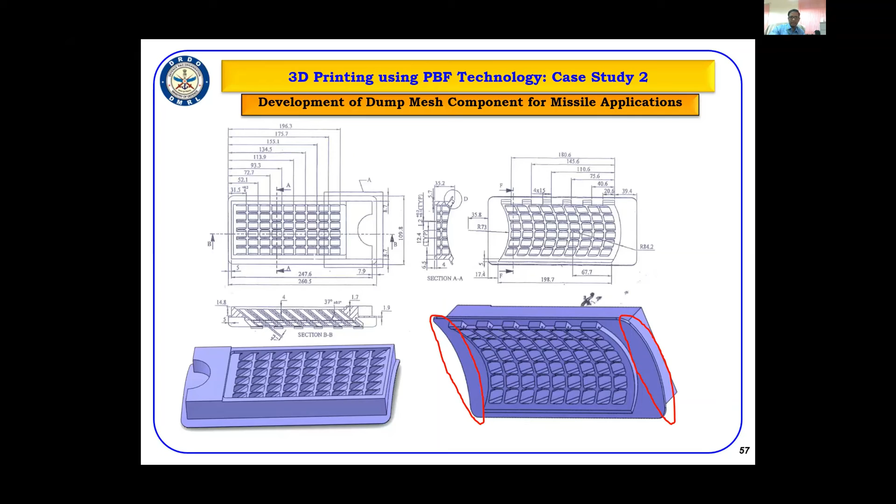Due to these limitations, the rate of production was also very low, so we thought this would be another component which could be taken up for consideration of 3D printing. After initial design review, we found the most appropriate orientation of this component with minimum support structures using simulation, and identified the support features required, along with specimens built in different directions.

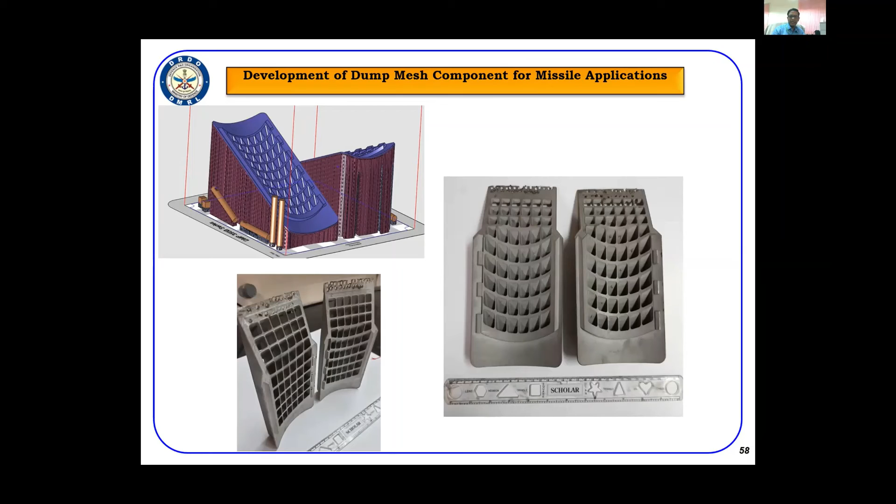Initially, we did not go ahead with complete 3D printing of this component. We only printed the sectional part to understand how these edges and channels are built, and what surface finish is obtained. This is again an advantage of 3D printing, where we did not have to manufacture the complete component. We can identify the critical region and understand whether requirements are met by 3D printing only part of the component.

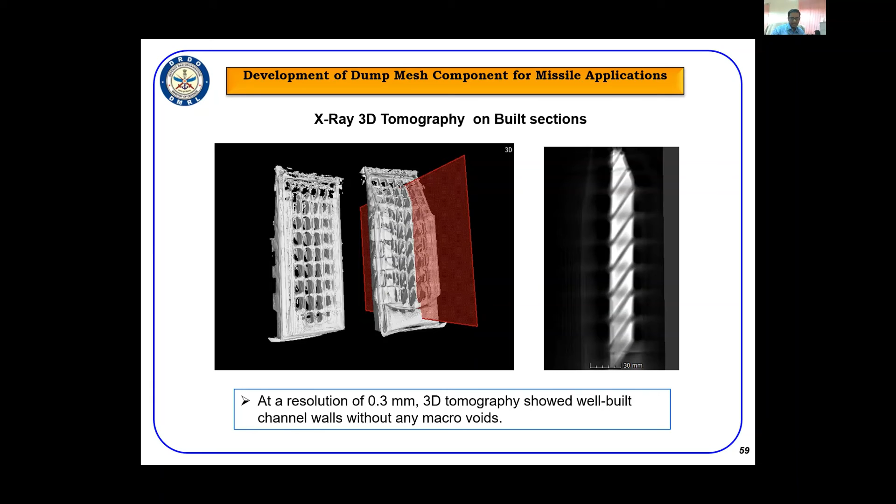This component was also subjected to 3D tomography to understand, layer-wise, what features are present in different layers. At a resolution of 0.3, it showed that the component was very nicely built without any voids or porous structures. We also carried out chemical analysis, which matches the standard specifications and the input feedstock material, except for the titanium composition.

When we carried out porosity analysis of the specimens built along with the component, this was done at 4 locations. They showed similar composition except for high titanium composition. Dark patterns and interlayer porosity were observed from radiographs in the inclined and vertical build samples. We could clearly see these dark patterns in both the inclined and vertical build samples.

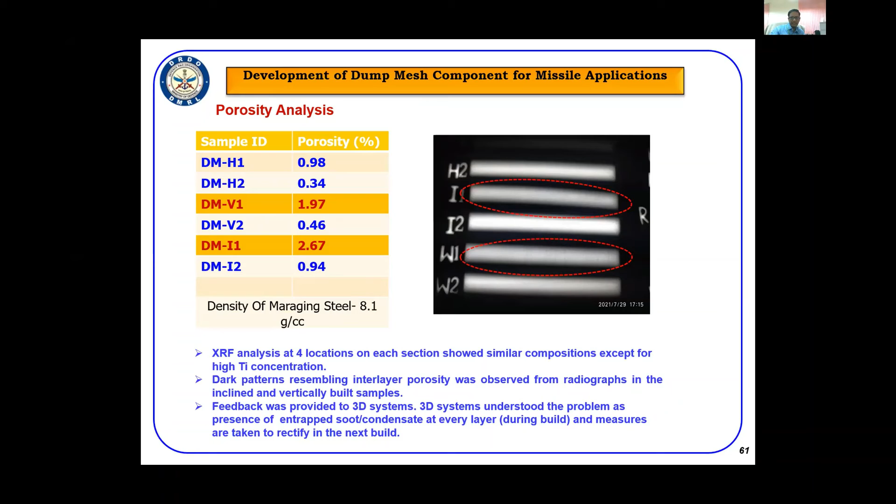This feedback was given to 3D Systems, and after discussion, we understood that the problem was related to entrapped soot or condensate. This means that when the 3D printing or deposition of the component is done, a lot of soot is generated, which forms on the surface before the next layer is deposited, resulting in impurities. We then took necessary measures to rectify this in the next iteration.

We also examined the surface finish, which is one of the major requirements for these internal features, at different places. We carried out measurements at 9 different locations of different sizes, and surface finish was found to be 3 to 4 µm. By use of post-processing techniques, improvement is possible while controlling the damage.

When dimensional analysis was carried out, the central region was found to be sagging by a certain amount of deviation. By building the support thicker, we could rectify this sagging problem in subsequent depositions, by providing thicker support structures and also carrying out stress relief treatment before extraction of the component from the build plate. These were the two additional exercises we undertook based on this dimensional analysis.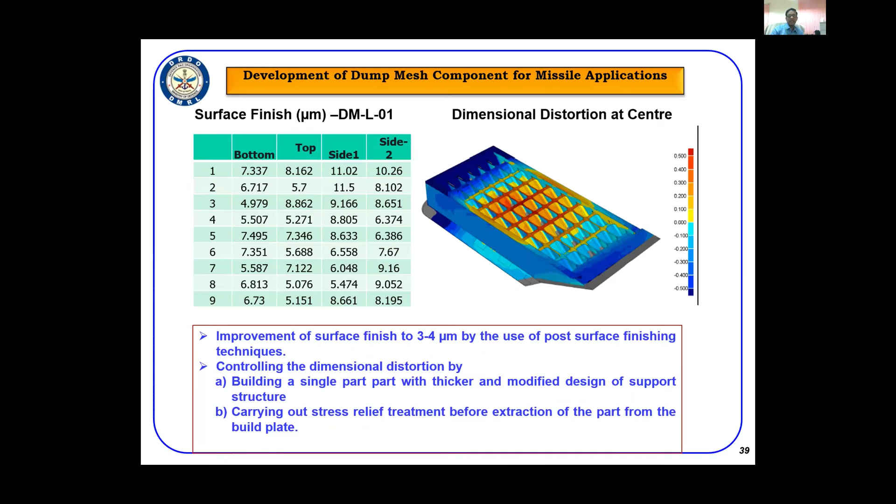Based on feedback provided from DMRL, we proceeded with the complete dump mesh component along with tensile specimens, using improved process parameters and design modifications. The component was then stress relieved and sandblasted for good surface finish, and we achieved a very good component meeting the dimensional requirements, with porosity also found to be very low.

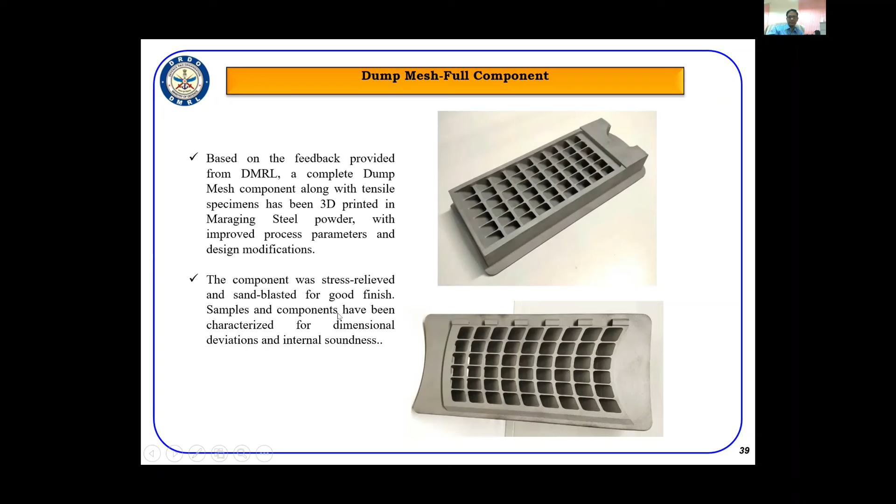We then carried out dimensional analysis of the component again. You can see that the whole component is within the required dimensional requirements, while other deviations occurred in the support structures. To solve that, we built only one single part to eliminate excess soot and condensate formation, whereas earlier we had taken 2 parts in the same deposition. In the next stage, we used only 1 part with thicker and modified support design to prevent sagging at the center. This overcame the problem, and with stress relief treatment before extraction, the component now meets the dimensional requirements in full.

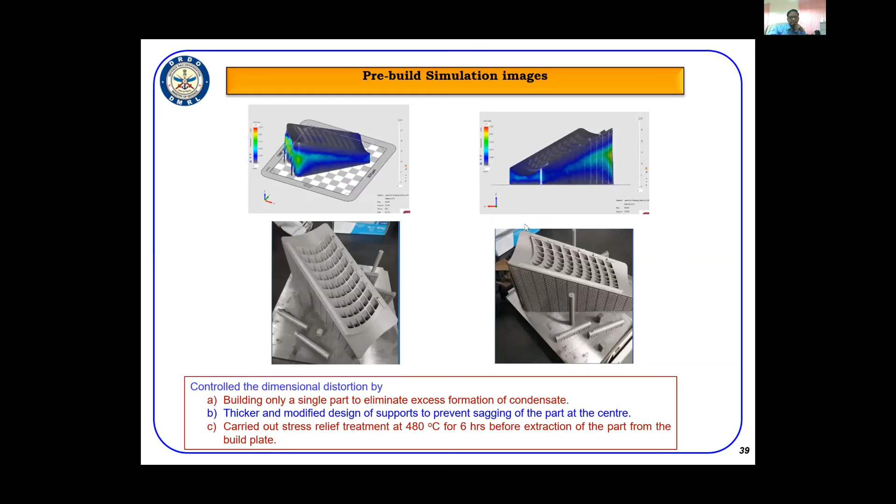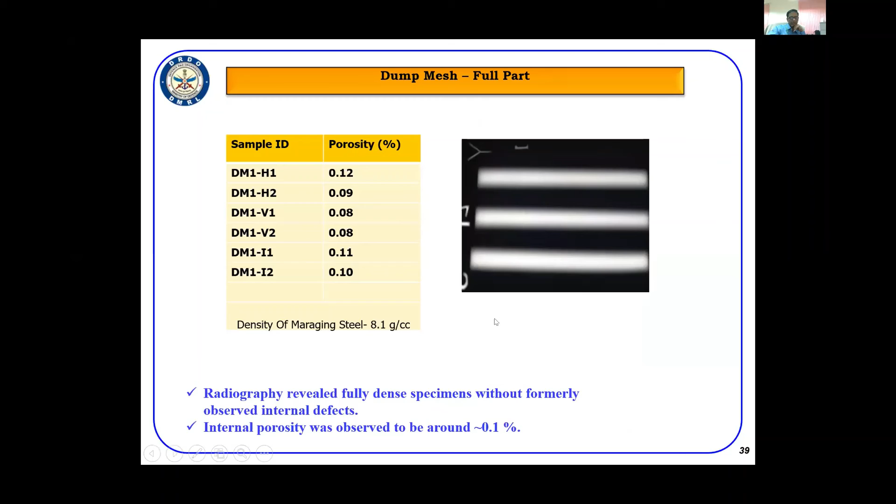Again, the chemical analysis has been carried out, which is meeting the maximum extent, and the radiography from the next build. The specimens have been subjected to radiography, which has revealed very good dense material deposition without any internal defects, and the internal porosity was observed to be around 0.1%. That means 99.9% dense material deposition has been carried out in this next run.

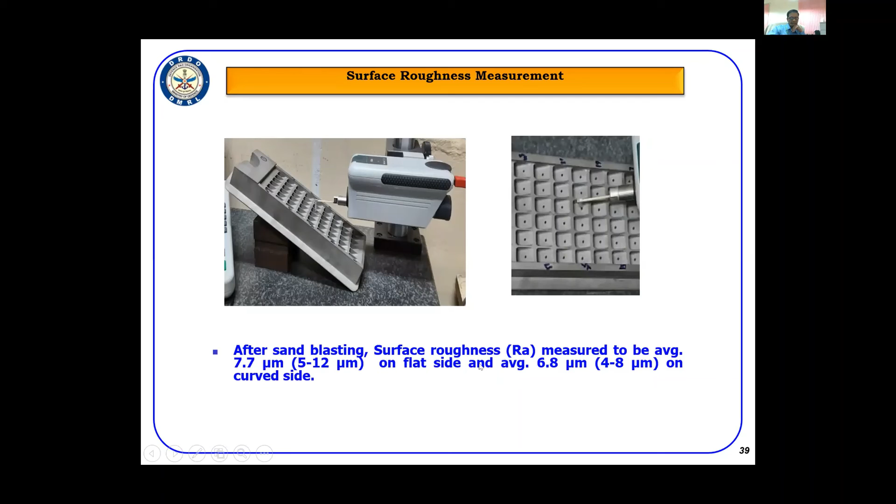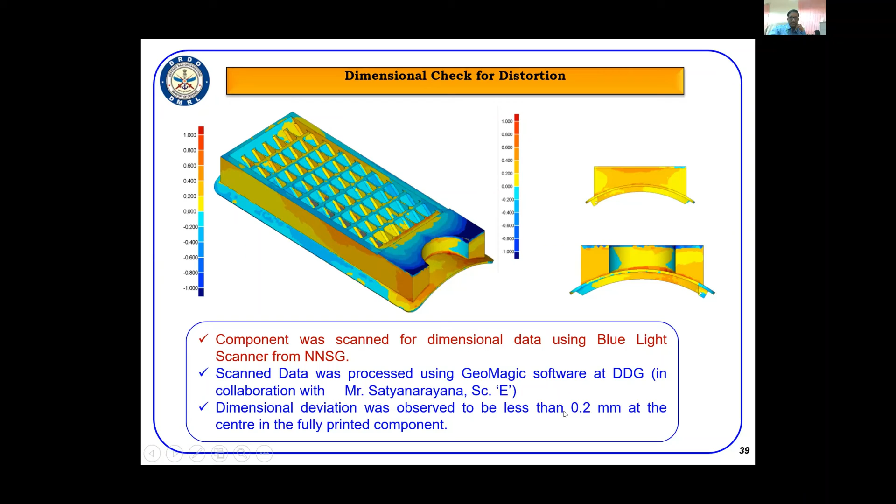So then after sandblasting, again we have gone ahead to understand the surface finish at each and every channel of this component, and on average we could get 6.8 on the curved side because of the stepped region. The component also has been further scanned for dimensional data using the blue light scanner, and the deviation was found to be less than 0.2, which meets the requirements of the designer.

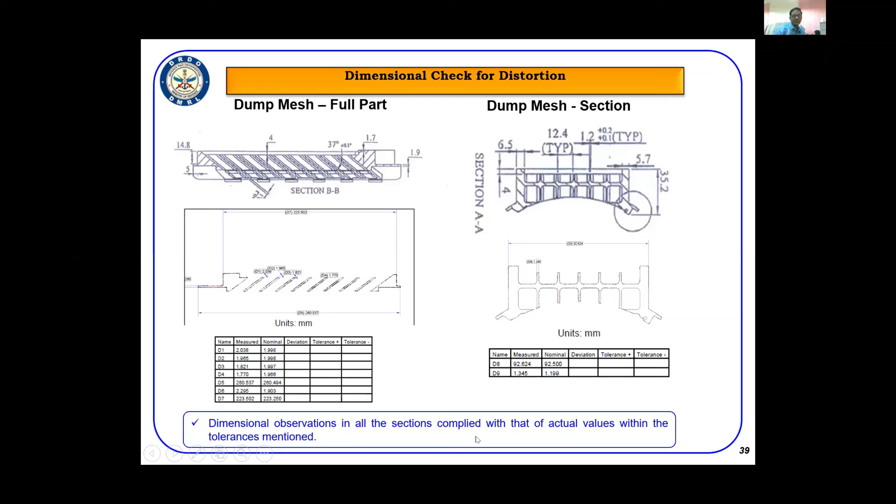Dimensional observations in all sections complied with the actual values within the mentioned tolerances. So to come to the conclusions of this component development of the dump mesh, we have studied and made necessary modifications to make it suitable for 3D printing, eliminating expensive tooling and CNC processes, and very, very less wastage. And it has been successfully deposited using the PBF 3D printing facility.

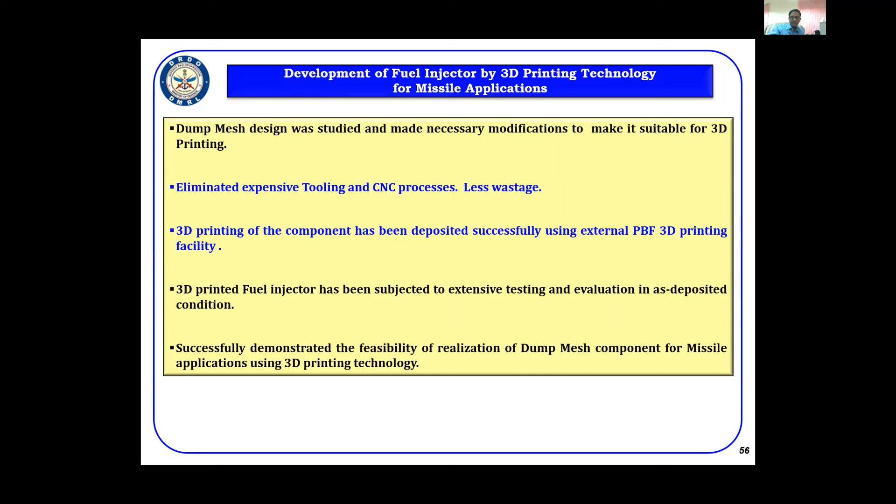And the component has been subjected to extensive testing and evaluation in as-deposited condition. We have demonstrated the feasibility of realization of this component for missile applications. Those are the two case studies which I thought to highlight. What I want to mention regarding those two case studies is that 3D printing is not just 3D printing alone.

Detailed evaluation of the component is required, to understand the in-depth features or metallurgical features, micro aspects, to see that the material not only meets the requirement in shape and size, but also in terms of metallurgical micro level and mechanical properties as per the requirements of the designer.

So now in this slide, I would like to touch upon the technological challenges that are there in metal 3D printing. This powder production technology for standard alloys and new alloys - presently almost all the metal powders being used are imported, so this technology has to be established within the country.

Another process is process development and standardization. Again, this is part and material specific. It is necessary to do process optimization by parametric studies, and also which type of machine we are going to take up for 3D printing also matters.

And the post-deposition treatment of these components is also one of the important areas one has to work on. That means we have to develop alternate methodologies for surface finish of the components, like abrasive flow machining and other machining to improve the surface finish. And hipping is going to play a wider role - that means hot isostatic pressing to even reduce the porosity of the components obtained due to additive manufacturing, mainly for aeronautical applications.

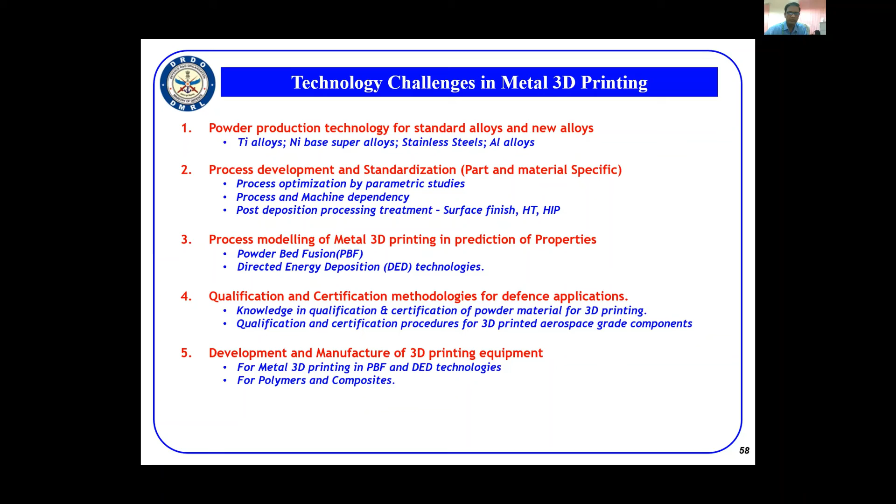And presently only metal 3D printing PBF equipment manufacturing has started in India, but there is also requirement for equipment manufacturing of DED technologies, both in respect of powders and wires as the input material. So this is one area where Indian industry can look into.

So finally, I conclude my presentation with these small statements. 3D printing technology is advancing at a faster pace, both PBF and DED for metals, and has many, many advantages. With our understanding of laser deposited materials, they are found to be at par with that of wrought, and it is possible to produce parts with similar strength in 3D print technology as those made by other standard or traditional manufacturing technologies.

We were able to demonstrate FGMs using the DED technology, and a fuel injector and other niche components using PBF technologies. These components which have been 3D printed have been subjected to extensive testing and evaluation, and we were able to overcome the problems understood in the initial stages of 3D printing. We have also demonstrated the advantages of 3D printing in these exercises.

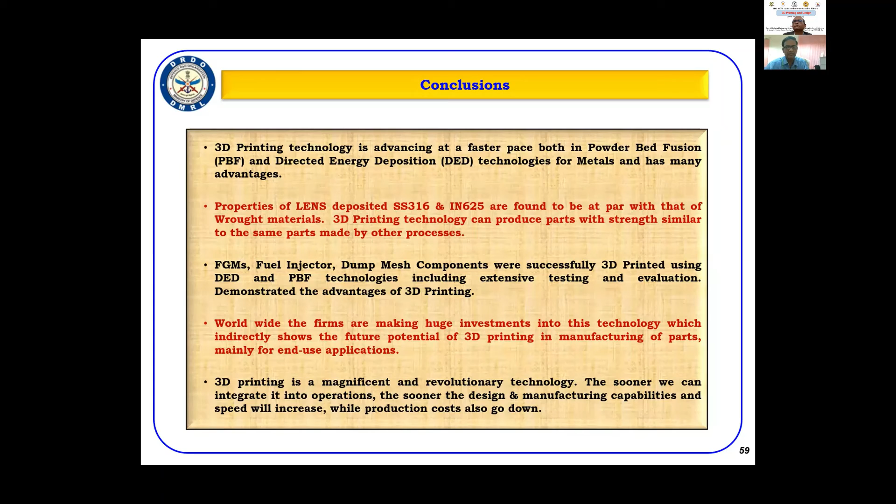You can understand worldwide, people are making huge investments, which indirectly shows the future potential. It is going at a very fast pace for manufacturing components. 3D printing is a magnificent and revolutionary technology. The sooner we can integrate it into operations, the sooner the design and manufacturing capabilities and speed will increase, while production costs also go down. With this, I conclude my presentation.